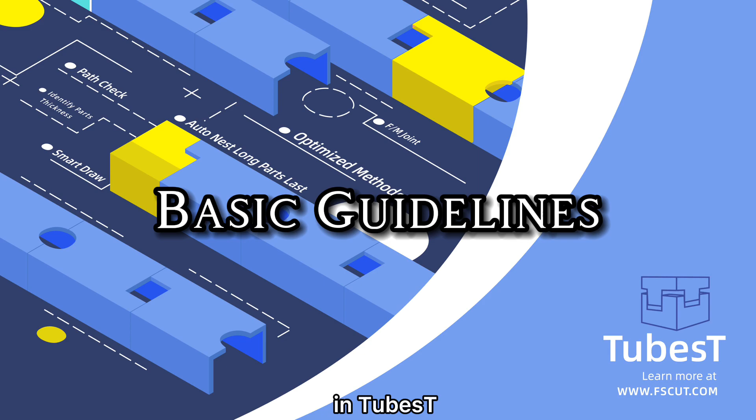And here are some main districts in TubesT you can pause to have a check.

This video is divided into 5 parts: import, process, nest, sort, and export respectively. The first we are going to talk about is import. After entering this software, the first thing we need to do is to edit the parts.

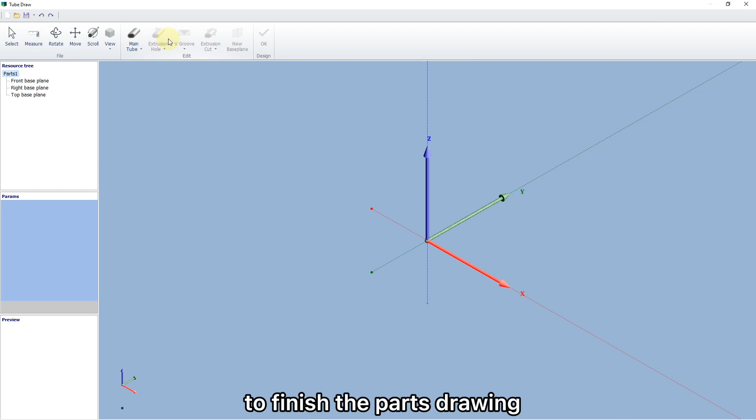Here are some common approaches to do that. Usually, we choose to draw a part manually. Click this option. You will be led to a new page to finish the part drawing. The above are some important functions, and we will talk about them in detail in the near future.

Click Main Tube. You can select any shape listed here you want. And in this blank, you can change the key parameters like length, thickness, and so on.

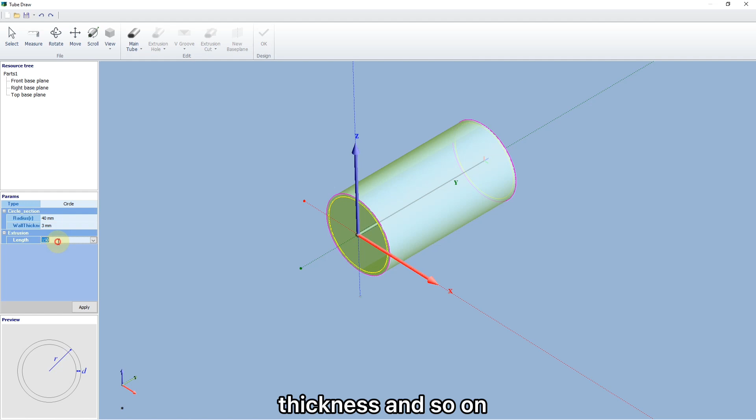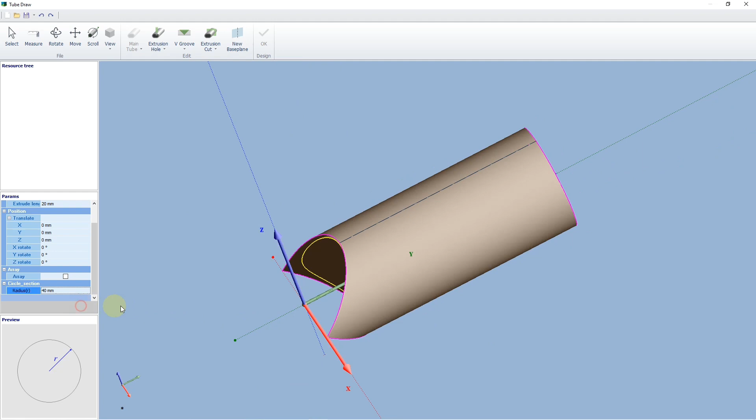Also, it supports you to add a subtool with designated shape. You are allowed to realize different effects by changing the parameters here. Click OK to save the change, and then we add a part into TubesT.

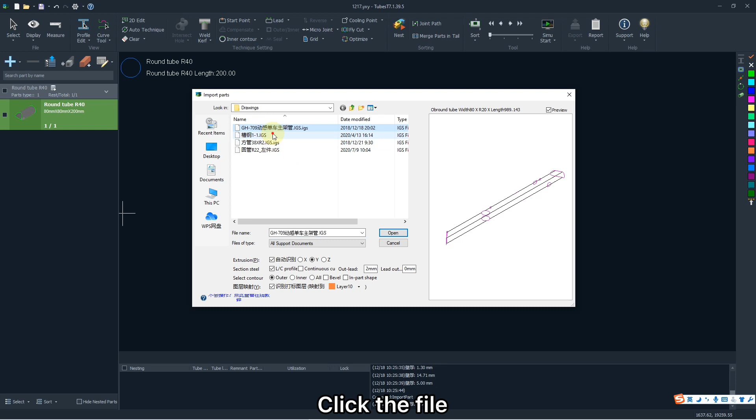And there are other ways to import the parts. For example, you're allowed to import IGS and SAT files if the part has been finished in other software. Click the file, there will be its preview over here. And you can also click to multi-select the files by holding Shift or Control.

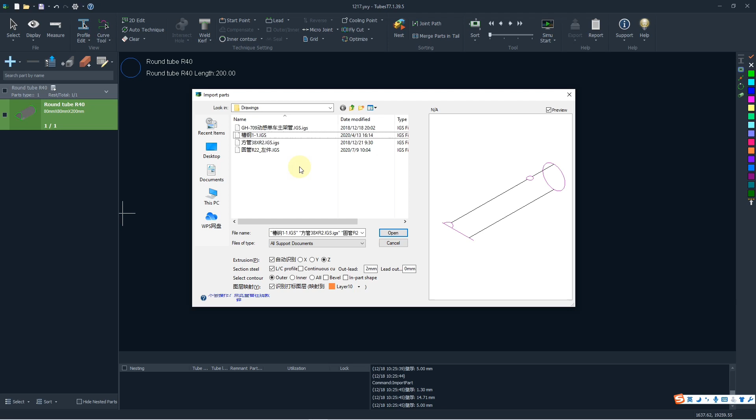And all parts selected will be imported at one go. You can browse the parts respectively to check if they are imported correctly.

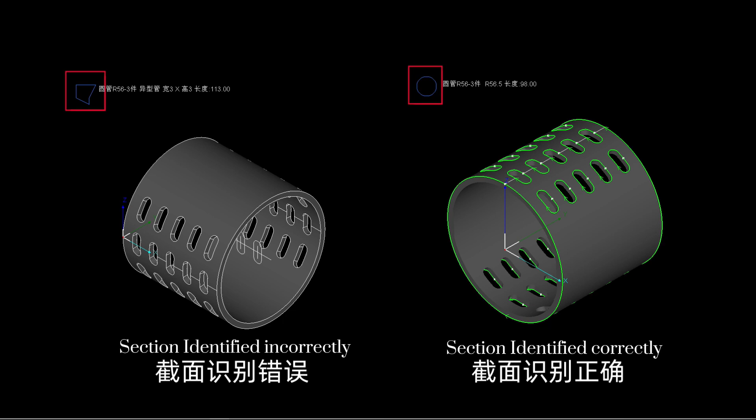To ensure that, you need to get 3 things covered. The section is identified correctly. Extrusion direction is along with the y-axis. Cutting path is reasonable. Generally, you need to check if there's no redundant cutting path.

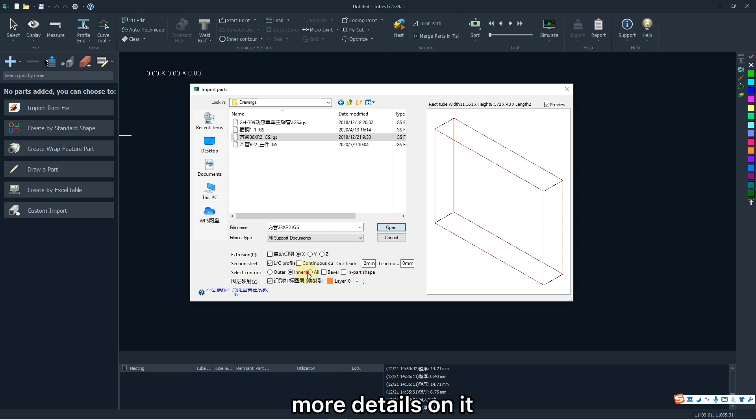If the part imported cannot meet the requirements above, maybe there's something wrong in the imported interface. More details on it we will talk about in the near future, and you can also contact us by email if necessary. And we can see the parts imported are listed on the left side in different sections with the previews. At the bottom, there are some convenient functions.

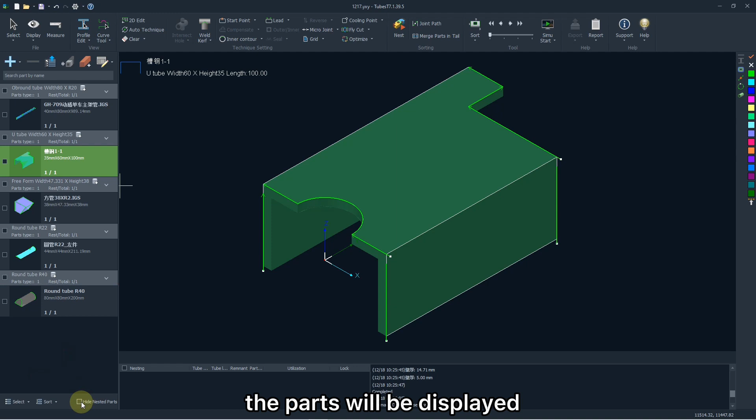Click the corresponding icon. The parts will be displayed in the main window, in which you are allowed to rotate the scroll wheel to zoom in or zoom out. Press the middle mouse button and move the mouse. You can adjust the view randomly. Press F3 to adapt the window, and press F4 to restore the default view.

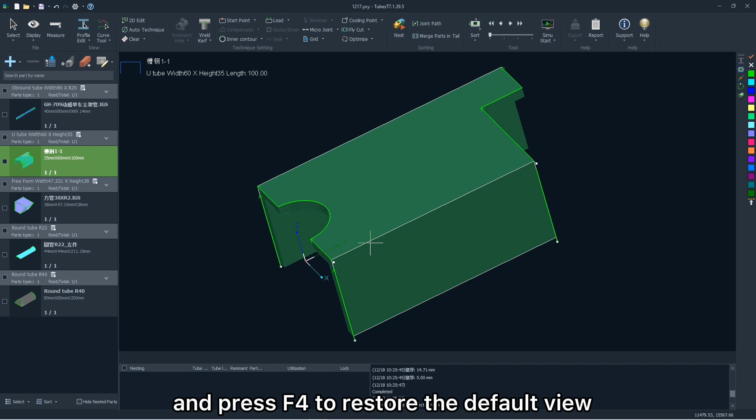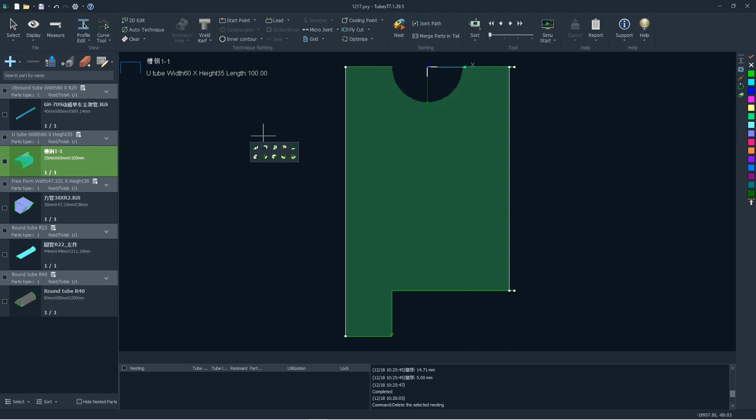Also, to change its view faster, you can double-click the part side and then select any one you want. Hold the middle mouse button and move the mouse to track the part position in this window.

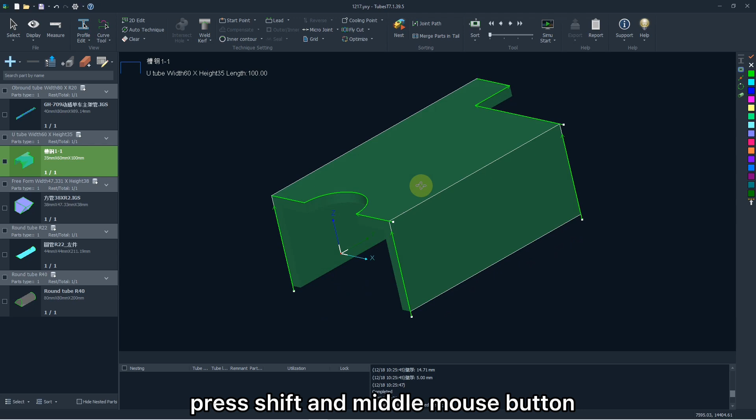Press Shift and rotate the scroll wheel to spin it slowly. Press Shift and middle mouse button to spin it a little faster. Press Ctrl and rotate the scroll wheel to spin it even faster.

Besides, you can click Display to modify the visual effect. Also, the interface skin and language are changed here.

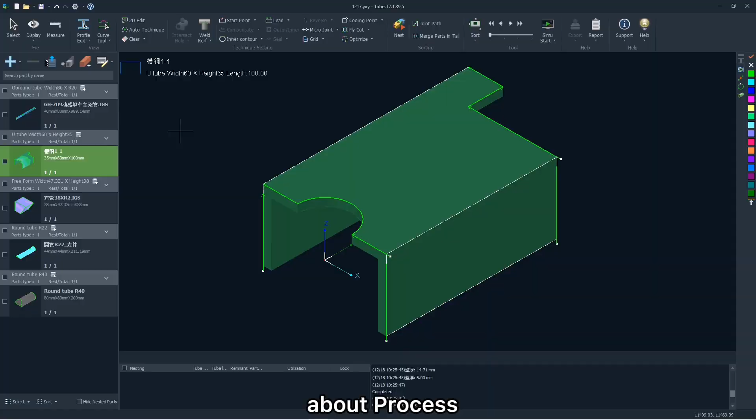And next, we are going to talk about the process, which has the capability to change the cutting path or direction by knowing the parameters of speed, gas, or something else in the cutting software. I will talk about some most common processes, like lead lines.

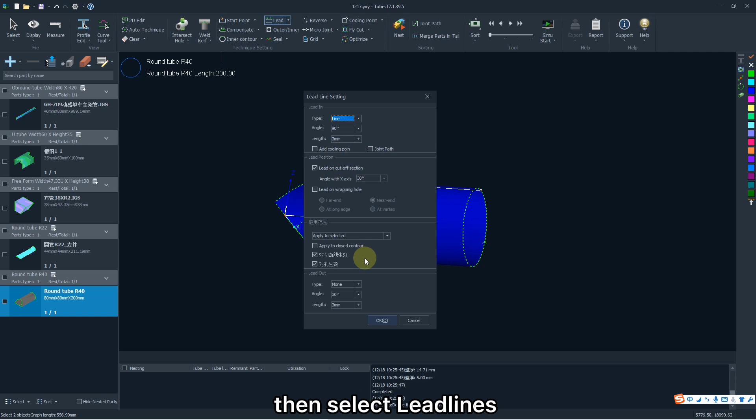Click a specific cutting path or whole part, then select lead lines and make some changes here. Click OK to generate the designated lead lines.

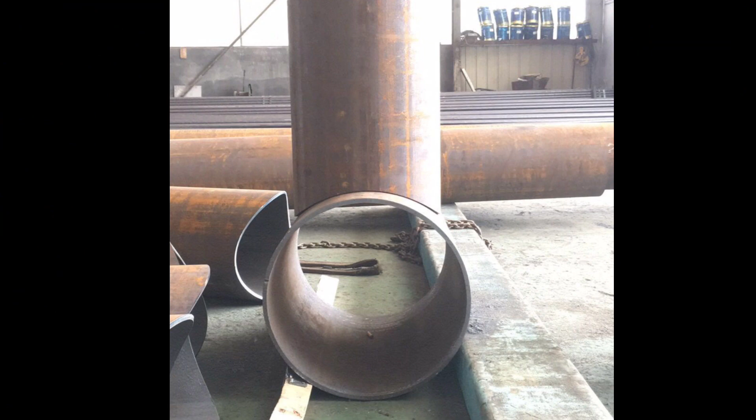And also, compensation for special parts to be jointed into T-shape like this. If you just cut it according to this kind of cutting path, there will be interference due to the differences between the inner and outer contour. To solve it, we can add a weld curve here. Then TubesT will automatically generate a special cutting path to offset the interference.

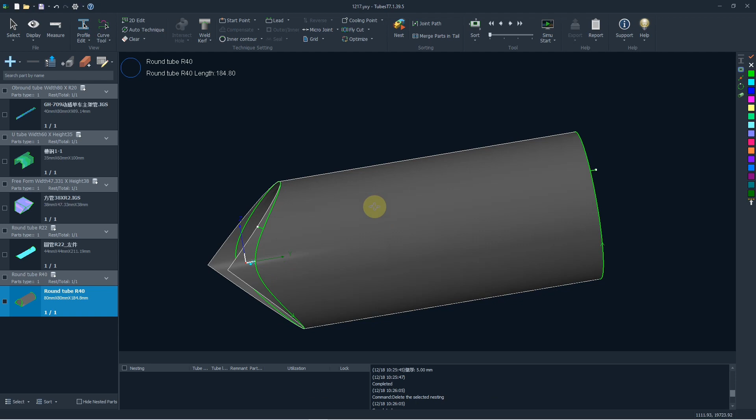And besides, there are many processes in this software. You can enable specific ones in auto technique. TubesT will remember settings in the future and will apply them on the parts imported or received. And we will talk about it in detail before long.

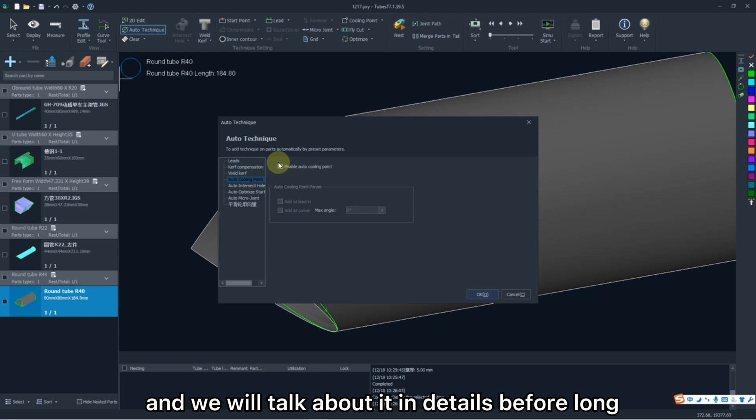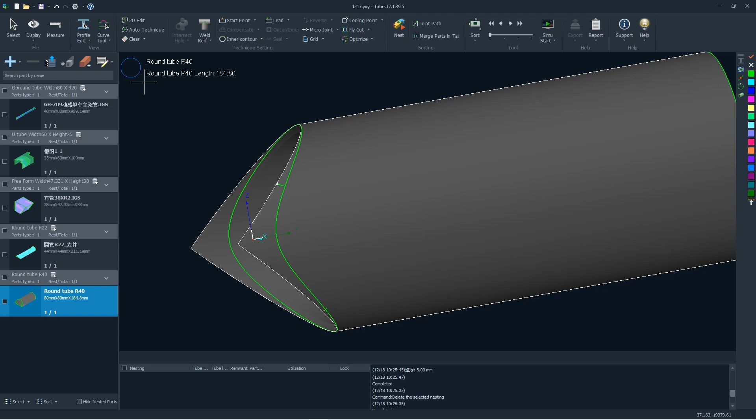Auto nest plays an important role in TubesT. Before that, we can make some batch operations to modify the part's name, amount, if added the text wrapped on the tube automatically. And you are allowed to make some changes here.

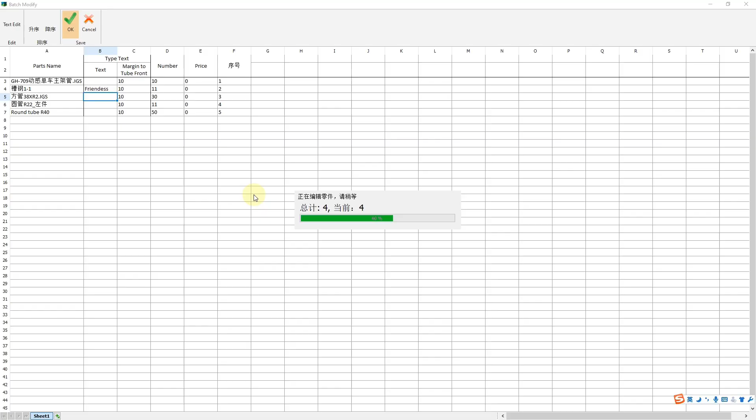Moreover, you're allowed to change them by clicking here, and also copy or even re-edit the part.

For special parts like I-shaped ones, there may be interference in the cutting path.

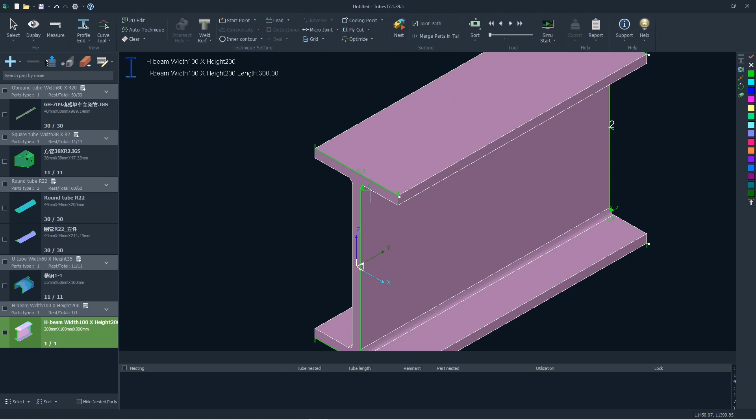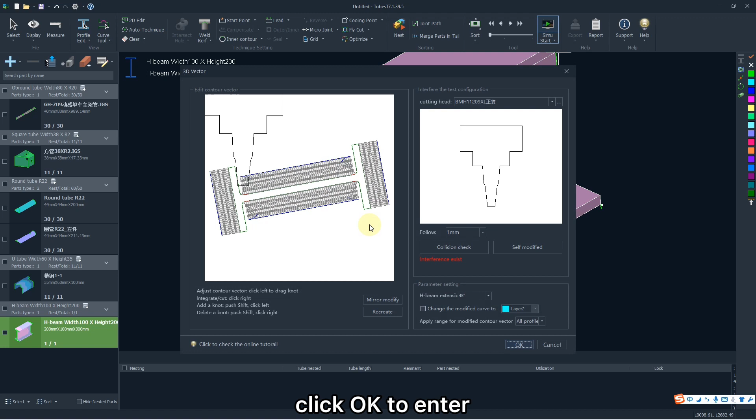If you simulate it directly like this, TubesT will give you an error notification. Click OK to enter the 3D vector window. Here you can have a collision check, and you can choose self-modified or not according to the actual result. But if you do, the 3D vector will be modified automatically and correctly.

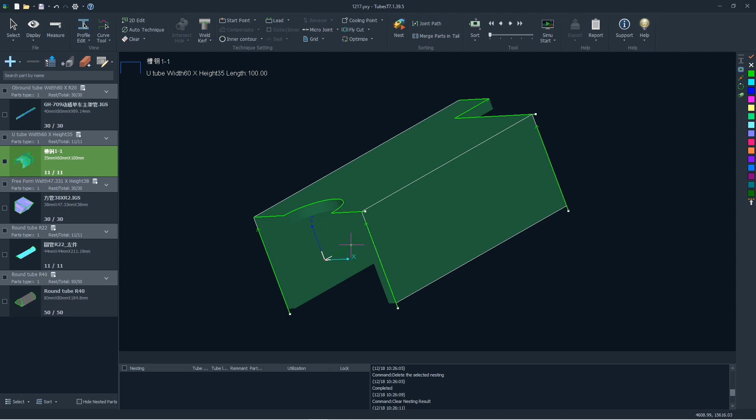Click Next. In the pop-up window, here is the tube information, including the length, dead zone, amount, section type, and remnant.

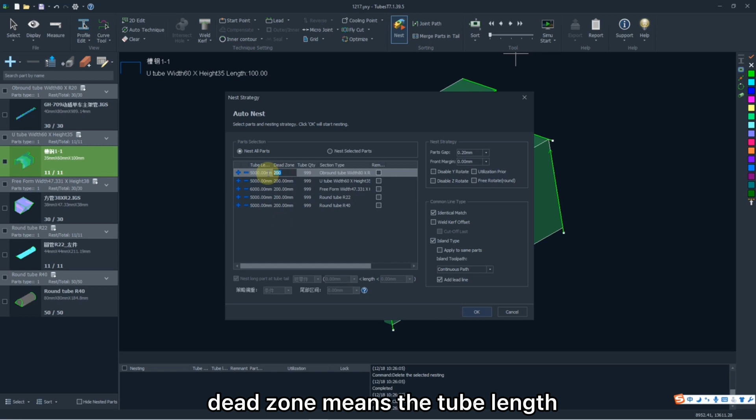The tube amount is suggested to be sufficient enough so that the parts can be nested completely, and the parts with different sections will be nested on different tubes.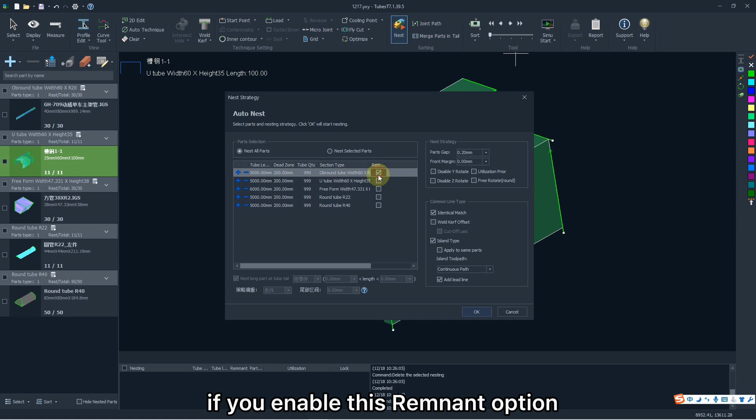If you enable this remnant option, the corresponding tube will be considered as the scrap tube, which will be nested in the first priority.

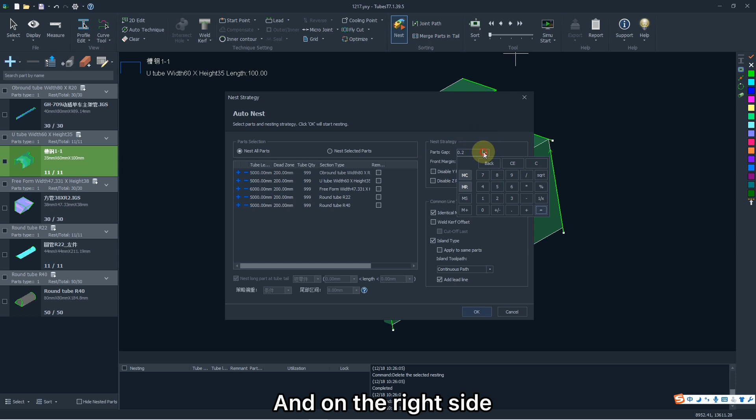On the right side, part gap means the interval between every two parts if you don't enable common line. But if you do, this parameter will be invalidated by default. Generally, you are suggested to enable identical match.

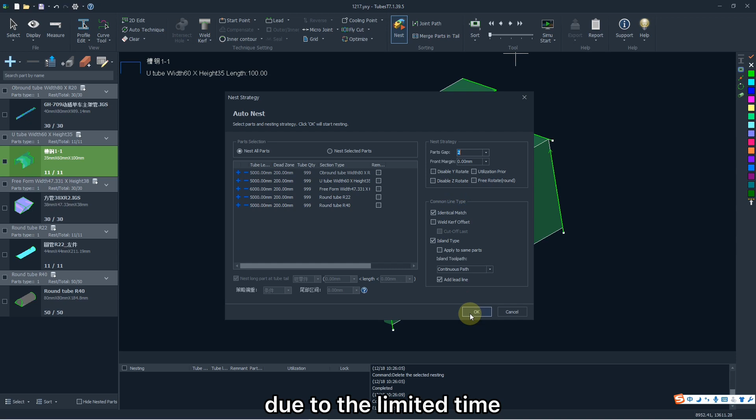As for the other functions, today we are not going to describe them in detail due to the limited time. Click OK to start AutoNest.

Here you can see that the part without common line has an interval, which we set just now, and the part with common line has this option disabled.

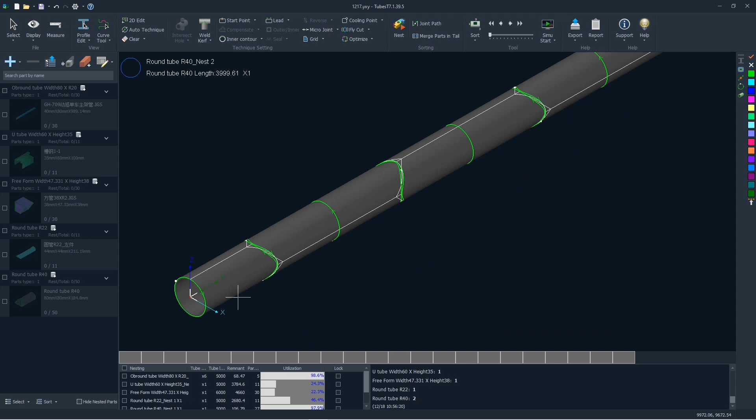The bottom is the nesting result zone, including some main information in which every line corresponds to one kind of nesting result. Double-click it to have a check.

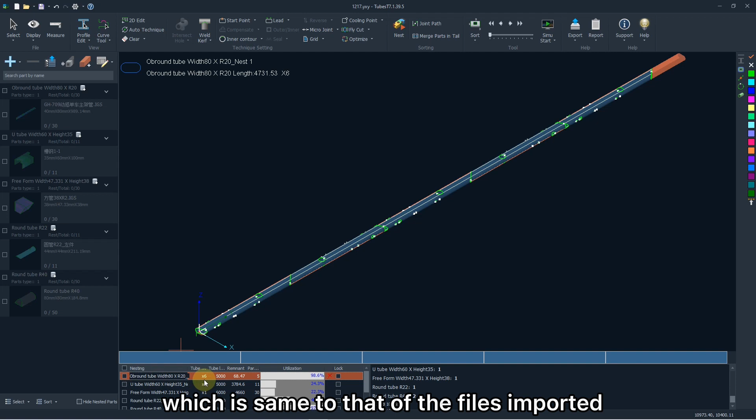Here you can see the nesting name, which is the same as that of the files imported, including the section type, size, fillet, and cutting times.

Cutting times means the times the parts will be machined. Theoretically, it cannot be modified directly unless you change the parts amount first, so it is unnecessary for you to calculate the cutting times of the nesting result by your own.

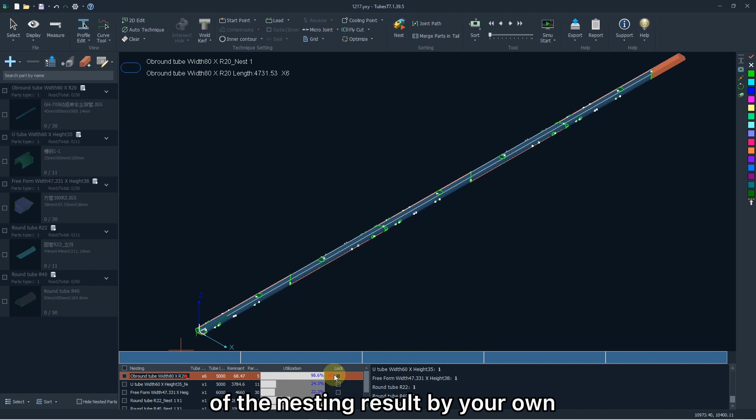Also, the tube length, parts amount, and some details will be shown here, and you are allowed to change the blank size manually.

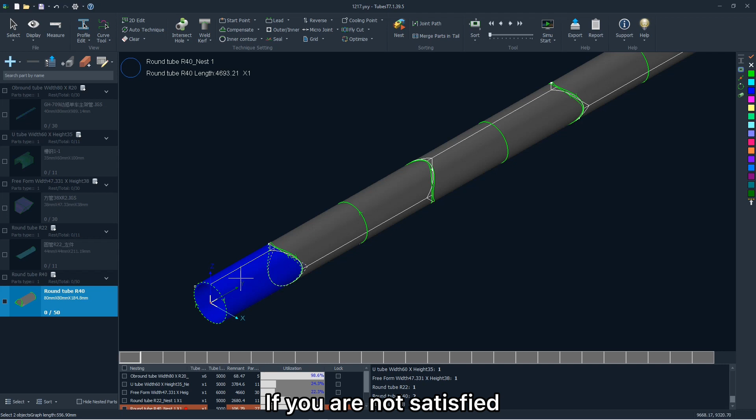If you are not satisfied with the current nesting result partially, double-click a specific part. There will be some operations here to adjust it, like move forward and backward, or rotate it clockwise or counterclockwise. More details about the nesting strategy will be introduced particularly in the future,

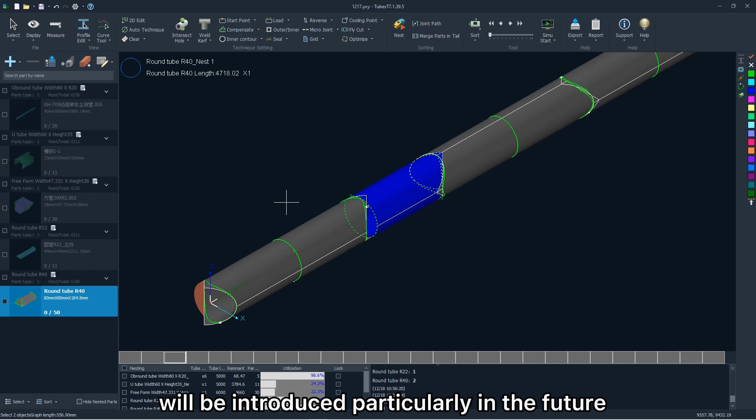The next is sort. Theoretically, TubesT will sort the cutting path automatically from the top to the tail of the tube, but you are allowed to sort it according to different strategies.

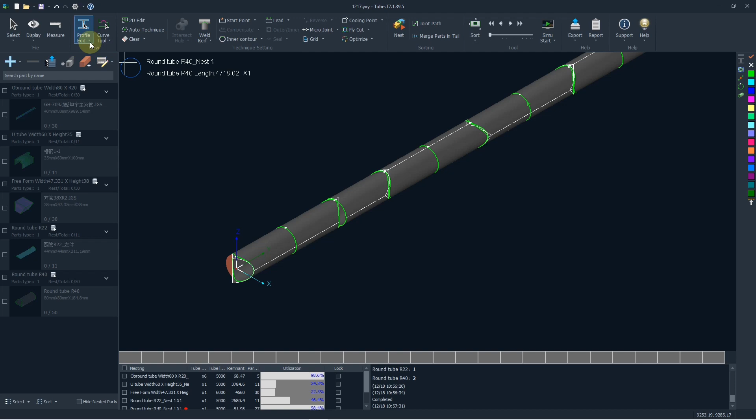To verify the cutting path is reasonable, click here to enable the Display Sequence tag to check the cutting sequence.

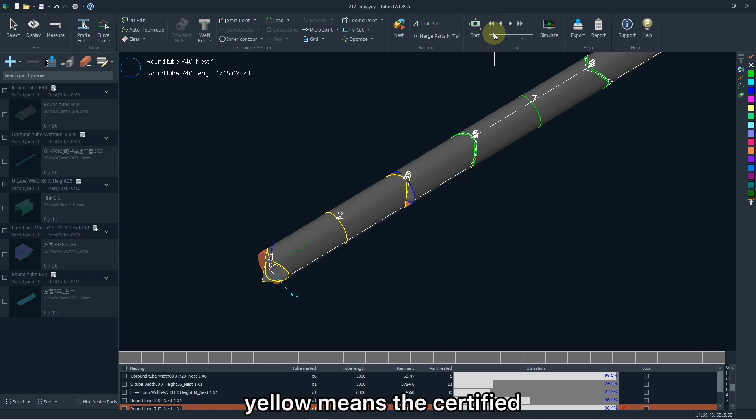Statically, you can click the inner arrow to verify every cutting path manually. Yellow means they're certified, blue the current, and green the to be certified.

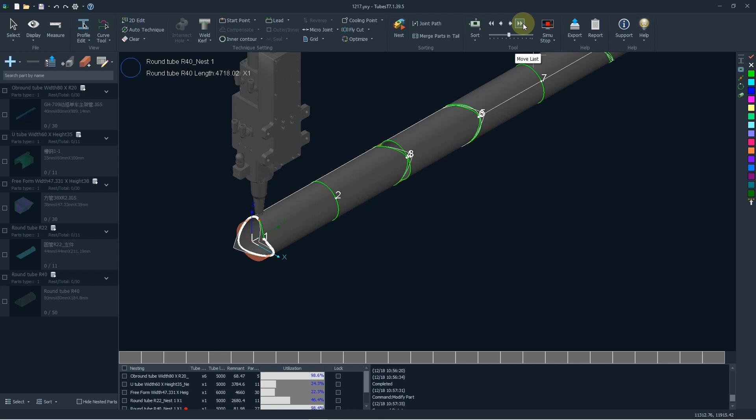Dynamically and more vividly, you can click the Simulate aside to generate a virtual cutting head, which can be customized to simulate the actual cutting. Also click the Alt arrow to adjust the simulating speed.

If you select one or a group of cutting paths, this specific part will be simulated only.

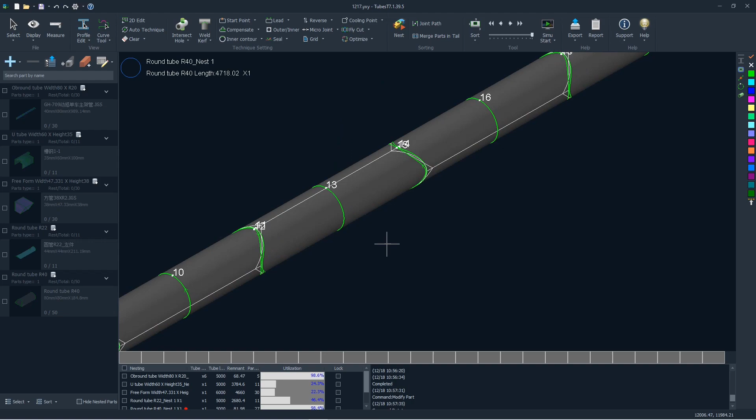Next we are going to talk about export. Click this icon on the left top of the interface. TubesT will export a file in YXY format, which is not used for cutting software, but an engineering file for nesting.

It will save all the results nested, parts imported, and the processes added. If you want to modify it slightly, like changing the cutting path partially, just open this file, which is able to save much redundant operation. Then you're allowed to continue the editing saved at a later time.

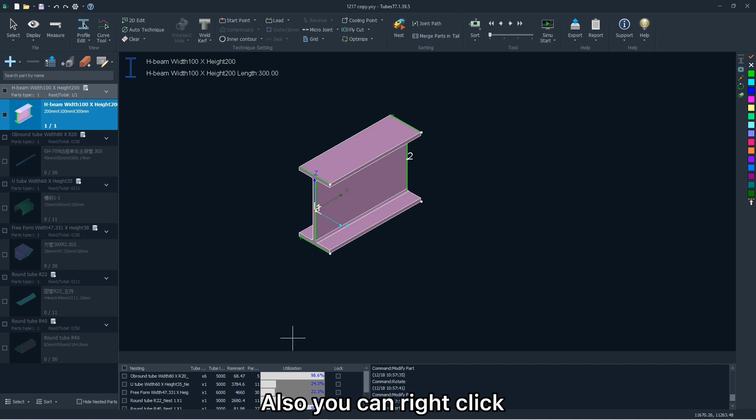Also, you can right-click the nesting result and click Export to generate specific files.

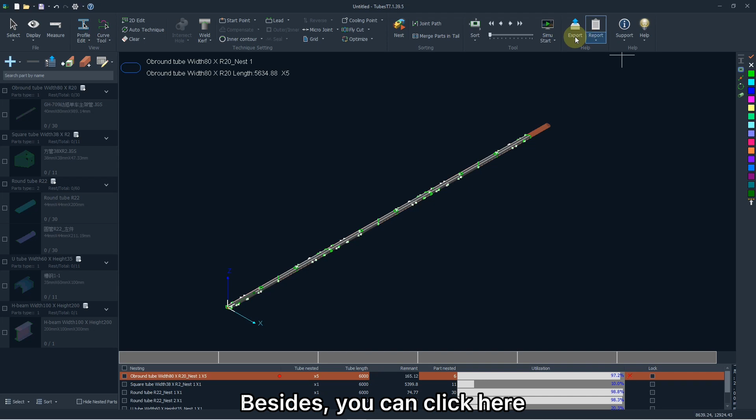Besides, you can click here to export a task package, including a group of files in ZX format. But it is necessary for you to use the TubePro in the version corresponding to TubesT.

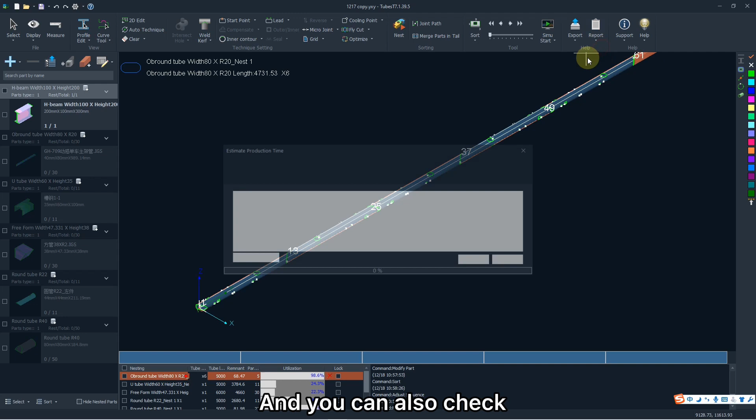And you can also check the time estimate for specific tubes. Parameters here can be customized by yourself.